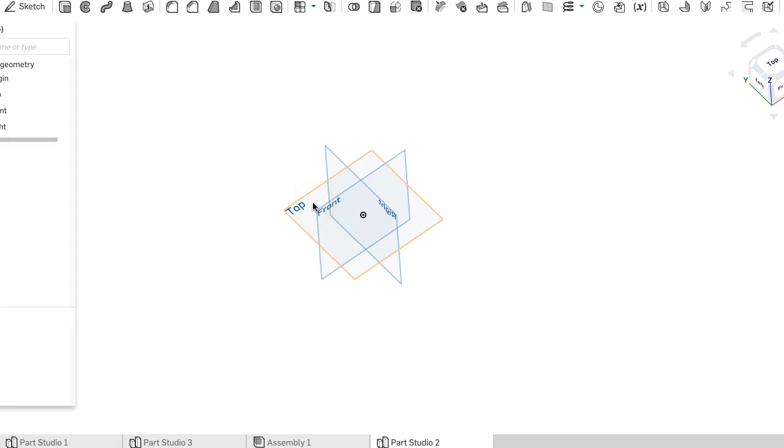Okay, so in this video, I'm going to walk you through making a coffee mug like this. One thing you'll notice is I haven't given you any measurements, and for something like this, I'm okay if you don't constrain it. I will include some constraints as I go, and some others I will not. So the first thing we're going to do is start by making the body of the coffee cup, starting with a circle in a sketch.

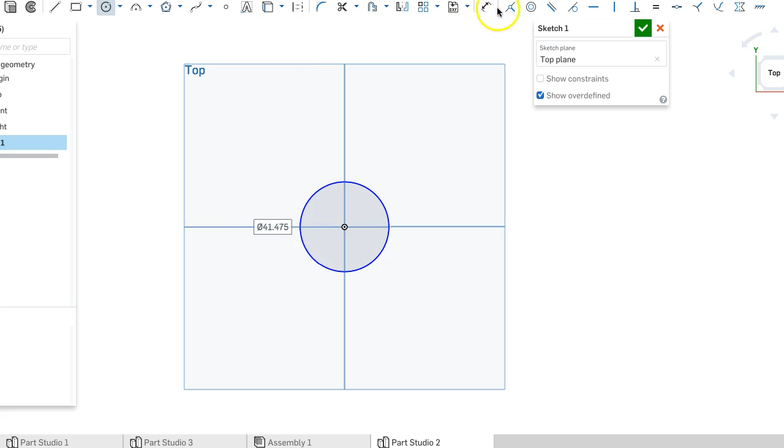Press N to get perpendicular to the sketch, and from here we're just going to draw a center point circle. We'll say that it has a diameter, so I'm going to dimension this. You don't have to do this. I'll just say that it's like 55.

And then I'm going to extrude it, and we'll give it a height of maybe 10 centimeters. I'm not really sure what the dimensions of a coffee cup are.

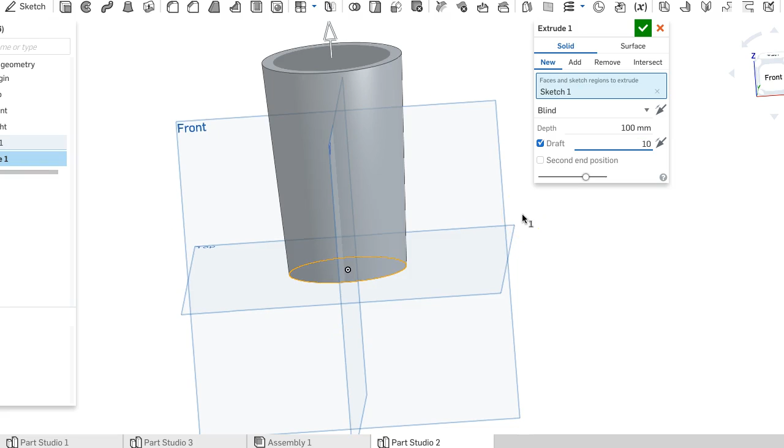So anyway, I'm going to add a draft here. Remember we saw the draft option. You can do it by clicking this, or by clicking up here somewhere. Let's see, right here, there's the draft option there too. I'm going to make it a little bit more extreme. Let's go with a 10-degree draft. It's maybe too much. Let's go with 8.

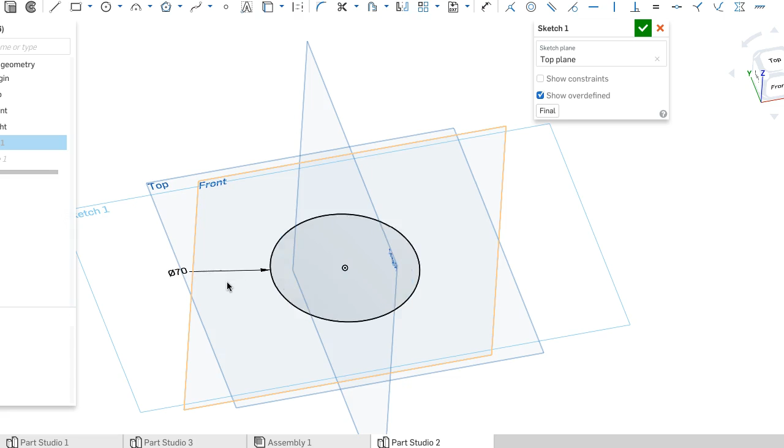As I'm doing this, I'm not really a fan of the proportions here, so I'm actually going to make the sketch at the bottom a little bit bigger, maybe like 65. Let's go with 70. Okay, and then we have this.

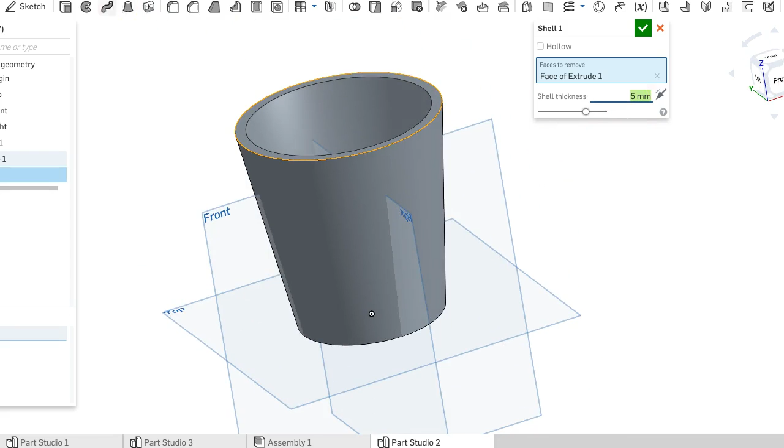Alright, so here's the basic shape of our coffee mug, and now we want to make it into a cup. So we're going to use the shell option and hollow out the inside. We'll give it a thickness of about 5 millimeters. Yeah, we'll do 5.

And then, you know what, I'll add some fillets around the top. We'll do a 2 millimeter fillet around the top and on this bottom edge, just to make it look more coffee mug-like.

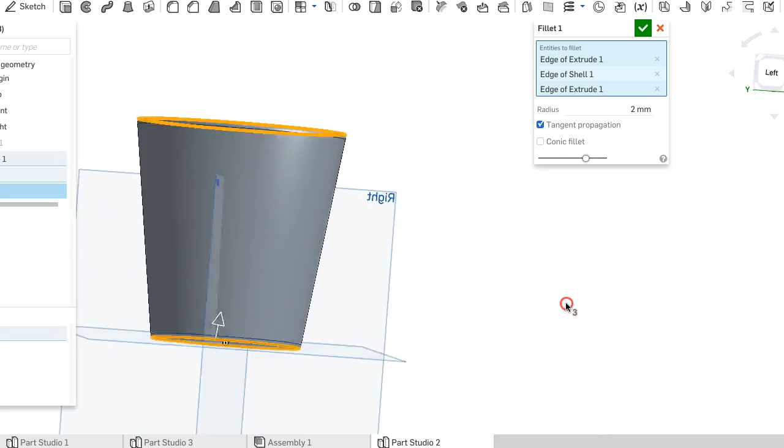Okay, and so the next step now is to add the handle. To add the handle first, we have to sketch what the handle should look like, and we'll use the sweep function to draw it out.

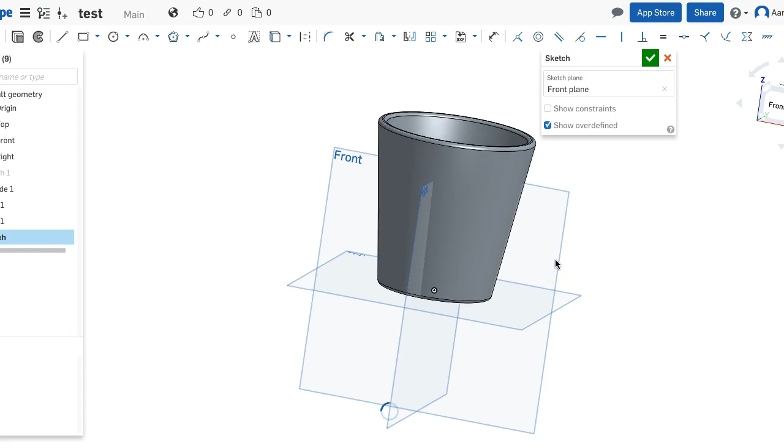To make this handle, we'll make a sketch on the front plane, and the trick is, if we're going to do the sweep, we need to attach it to the side of that front plane. So I've chosen that sketch and pressed N to go perpendicular. Looks like it's freezing up on me, so I'm going to pause it for a minute. Alright, looks like I've fixed it.

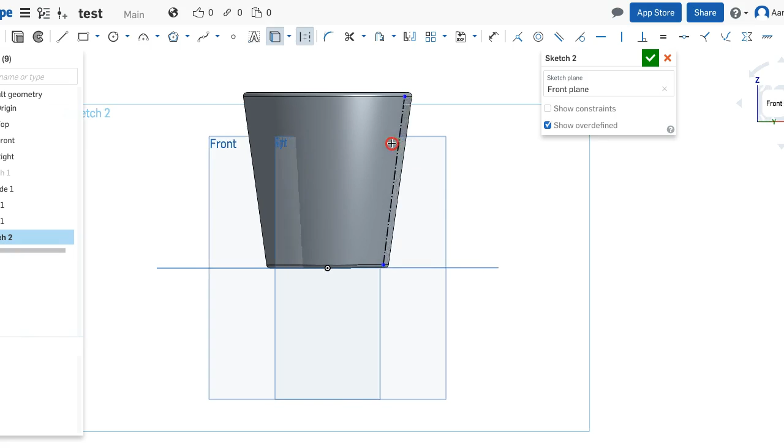So what we're going to do is project this line, and I'm going to make it into a construction line. I made a projection from the mug so I can attach the handle to the mug, basically.

And so I'm going to make a spline. Alright, so maybe we'll make the handle look something like this. Okay, and then we press escape to stop. Oops, get rid of that one. And then I can kind of click these to adjust the shape of it, kind of what it looks like.

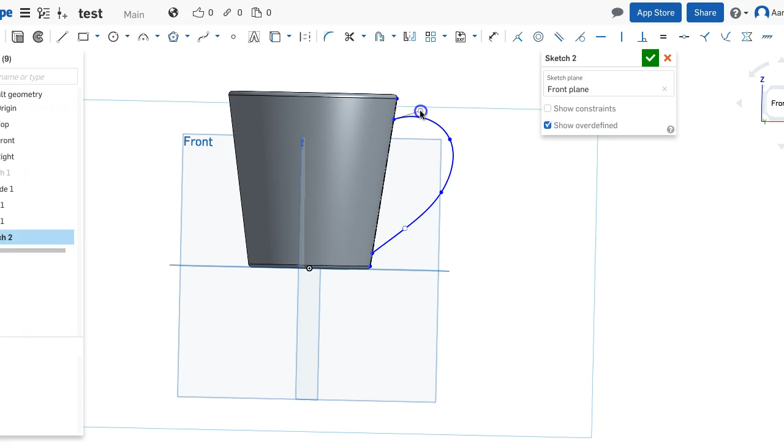So we have a nice mug here. Maybe I'll make this come up a little bit. Okay, and so this is what our handle is going to look like.

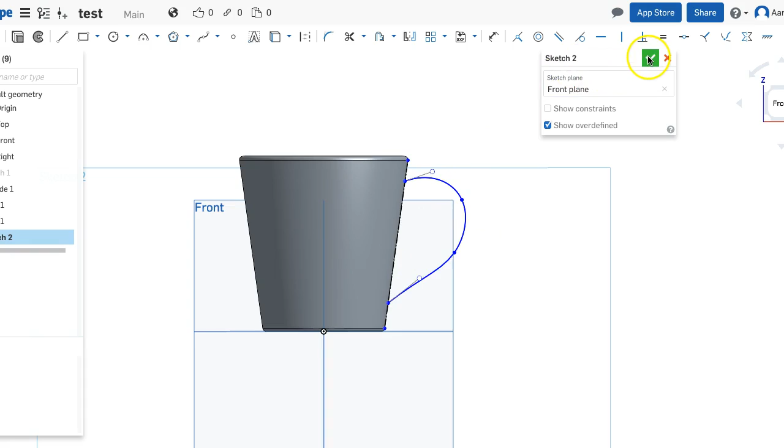And so now we just need to make the shape of the handle. What we're going to do is this: we're going to make another sketch that's on this line, and in order to do that we need to make a plane for that sketch to happen. So we're going to create a new plane.

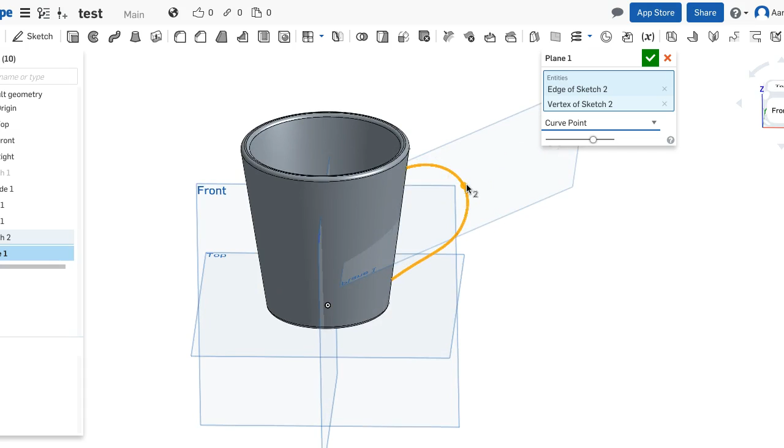Like before, we're going to do a point, a curve point. So I select the curve, I select the point on the curve. I'm going to create it there. I'm going to press, and I go check, make a sketch on this plane.

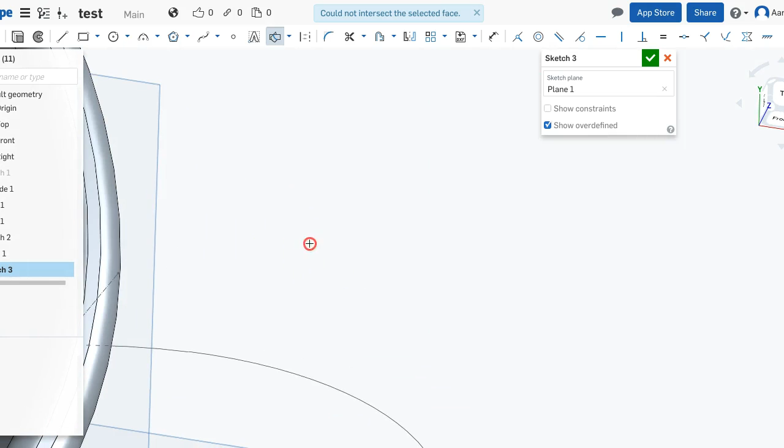And now what I'm going to do is choose an intersection of the plane and this line here. It's not going to do that. Never mind. But what I'm going to do is click to use that line. Never mind, I'm going to click to use that point. There we go.

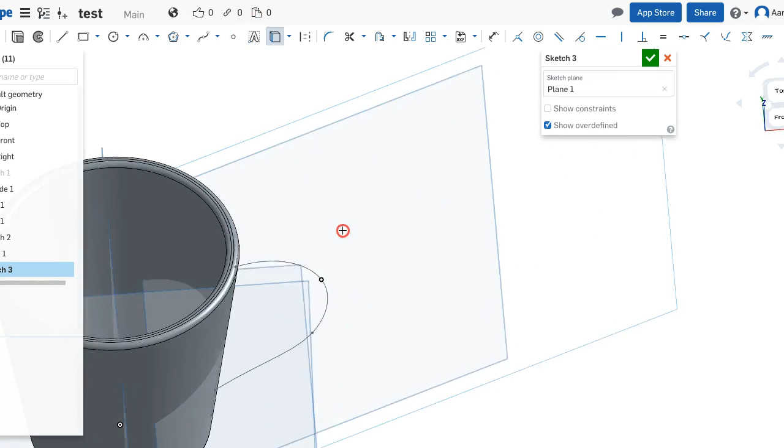And I'm going to hide everything so that it kind of gets out of my way a little bit. So this is where I'm going to sketch the handle, and it's going to be just like a rectangle.

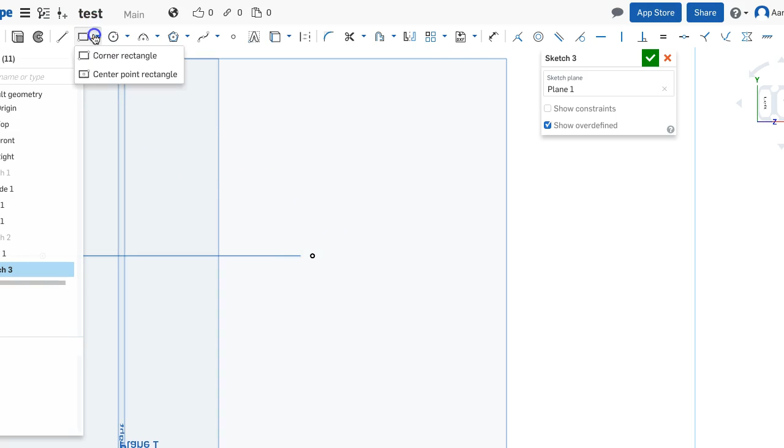Oops, let's do a center point rectangle, with some arcs on the side. Like that. This is kind of a big handle maybe, or a wide handle. So from here, maybe I'll shrink it a little bit.

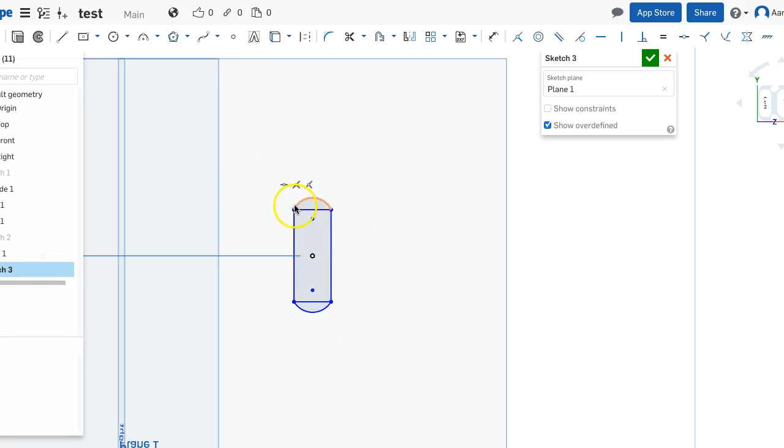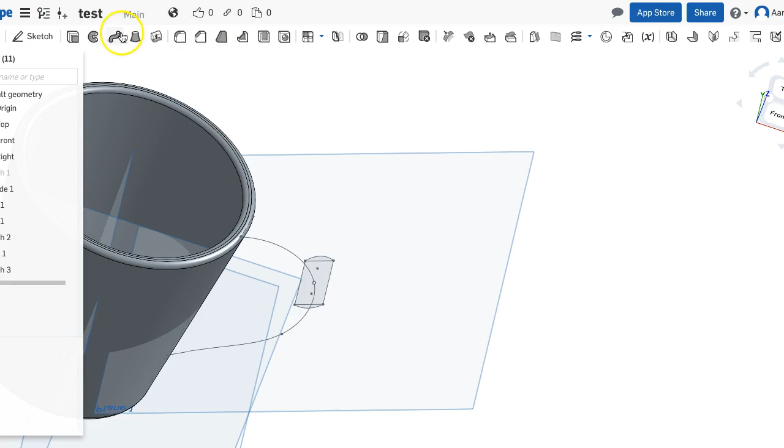Alright, we'll see if this works. So I'm going to bring back the sketch so I can see it again, and the shape so I can see it again. What we're going to do is use the sweep. I'm going to select sketch 3, clicking it over here as my face, and then click the path and choose this as my path. And there you see that handle showing up.

And now you can see there's a couple problems. It doesn't quite go all the way - you see how it doesn't really come up all the way to the mug. And so this is where we can use the move face. I'm going to check this face right here.

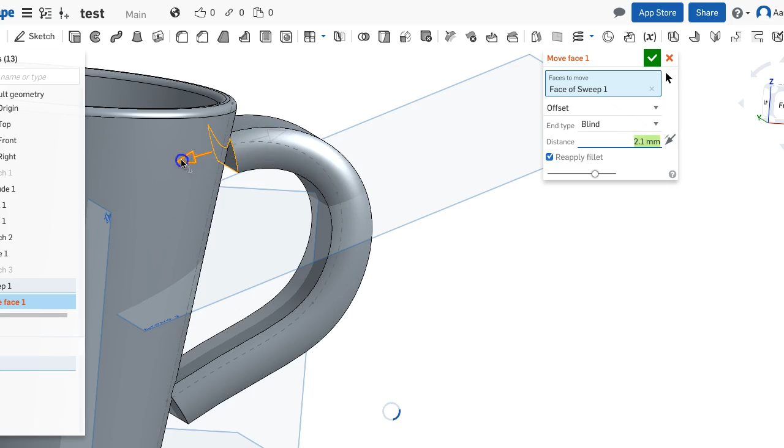And I'm just going to pull it until it comes all the way through. Alright, that didn't work. Something wrong there, it's not letting me move that face.

Let's try this other one. There you go, so you can move there. We can move that all the way up to that face. I guess you can go too far with it - that was about 8.8 millimeters.

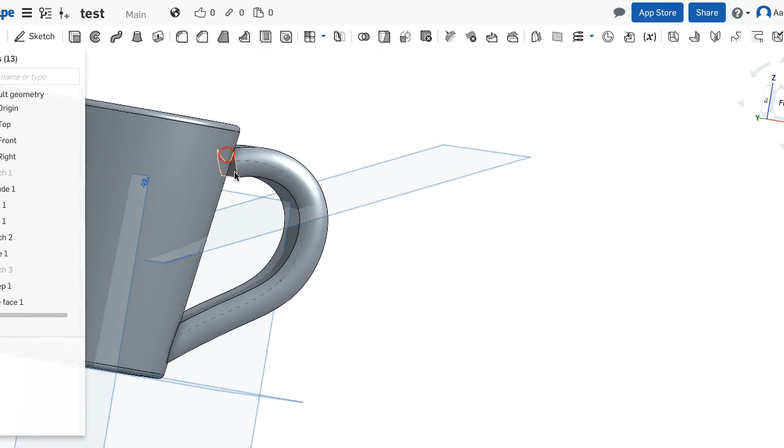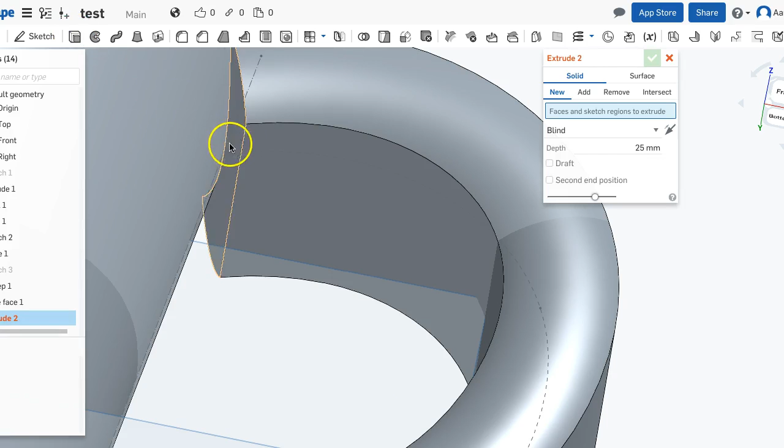I'll try again with this one. Choose move face. Doesn't want to, because it could not offset the selected faces as selected. Alright, so the other thing we could try to do is extrude that face, so we can say extrude and then select that face.

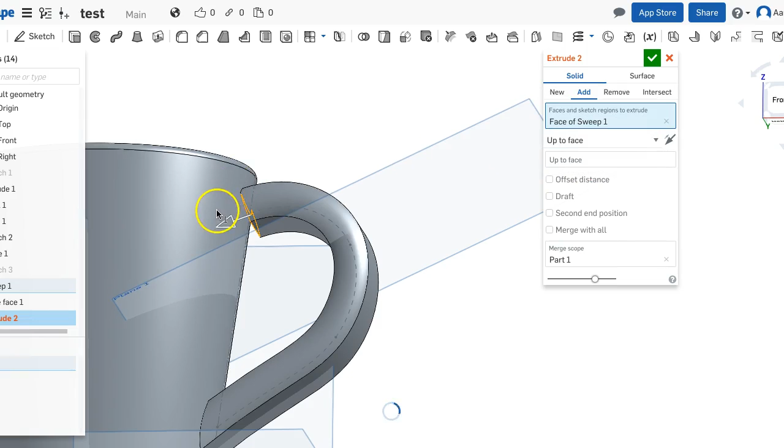And we can choose up to part, and then we'll choose the surface. Let's see, up to face maybe. No, you know what, let's just do this - let's go up to, let's just do blind, and then I will just drag it just barely enough.

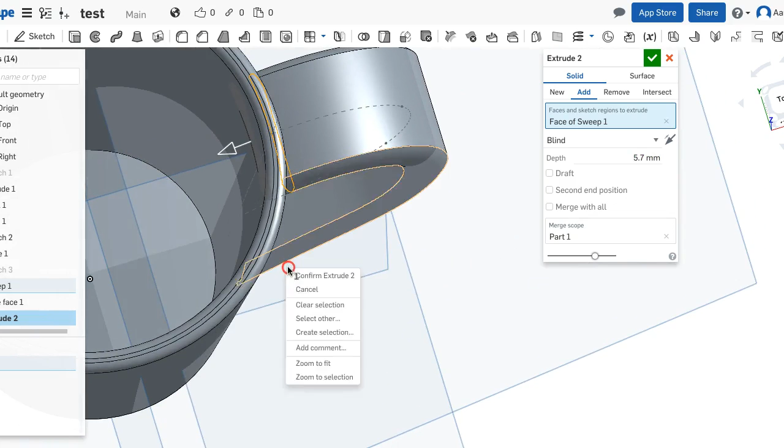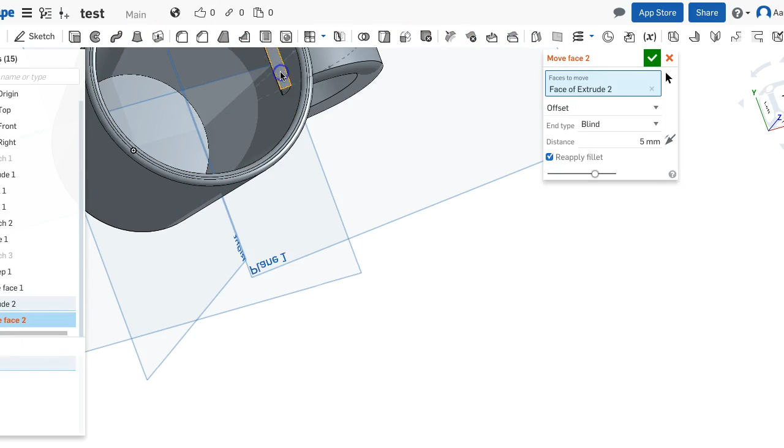And you see we have a little bit of it poking through. So what we can do now is with that extrude, I'm going to pull it a little bit further, and then I'm going to move this face right here. And it's not going to go away. Alright, anyway, let's worry about that later.